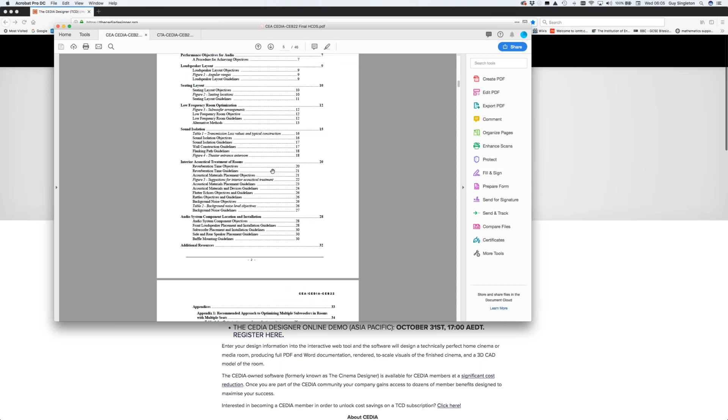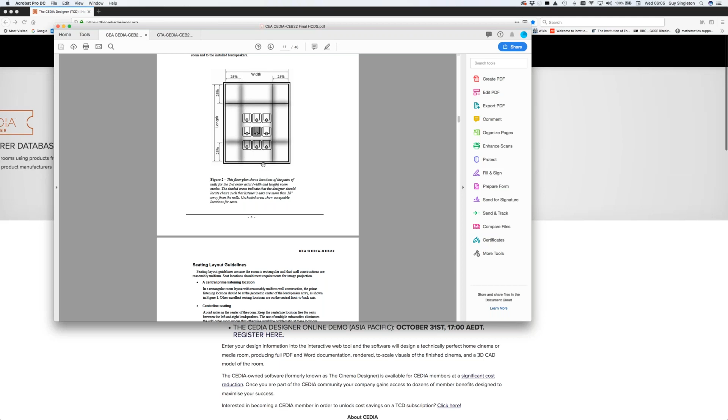TCD isn't subjective. It's not my opinion on things. It's actually based on these two standards, as well as the ITU documents, Dolby's document, DTS's document, other codec development documents, primarily things like Auro as well. So all of those standards documents have all come together to allow us to produce TCD, and in essence, we found it really, really successful to do jobs this way.

TCD has a number of brands in the tool at the moment. I'm sure that if your brand isn't in the tool, it won't be long before it is. Before CEDIA had acquired it, we had about 65 brands or 60 brands, and each one of those had a number of SKUs. So we had maybe 3,000 or 4,000 SKUs within TCD. Now CEDIA have it, obviously it's becoming a lot more of an attractive proposition to some of the slightly smaller and more obscure brands. And we can see this probably doubling in the next 12 months. And then ultimately we have a goal of around sort of 400 potential manufacturers that we are working with or have approached us. So we hope that will be a really good thing.

Pricing, if you're a CEDIA member, and my assumption is that the vast majority of you on this call are, you get the first tier of this for free. So this is media room. This will do your 5.1 subsat systems with a flat panel display. So this will allow you to do a little 5.1, 7.1, flat panel display up to about 65 inch. And that is a free member benefit from CEDIA. So the cost of subscription for that alone is probably worth your membership fee, I would guess. The vast majority of people's day-to-day design and documentation requirements are probably in that media room category.

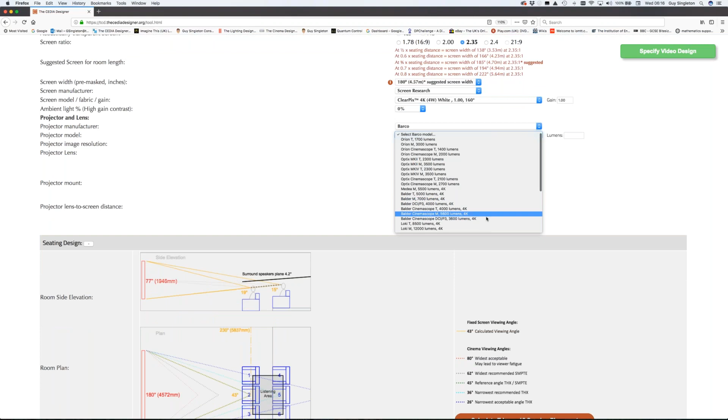So I'm going to choose a fabric. I've got a gain of 1.00, 160 degrees here, so I'm kind of starting to build a bit of a picture. I'm going to choose a projector for this - perhaps a Barco Balder. And now I get to choose the lens of this. So if I choose one of these lenses, an EN68, it's going to tell me that it's a prime lens.

It's a fixed focal range, and my projector has to go there. If I do this one, it's going to tell me it's got to go there, and you can see the projector moving around in the drawing, and it needs to stay within this green cross-hatched area. So if I choose 63, and I can keep going to 61, this is pretty much where I want to use it.

Now, would I like the projector fixed to the ceiling? You can see the projector moving - fixed on a pole, in a ceiling lifter, built into a bulkhead or a coffer, or put through the wall into a projection housing or a different room at the back. And that's pretty much what I'd like to do.

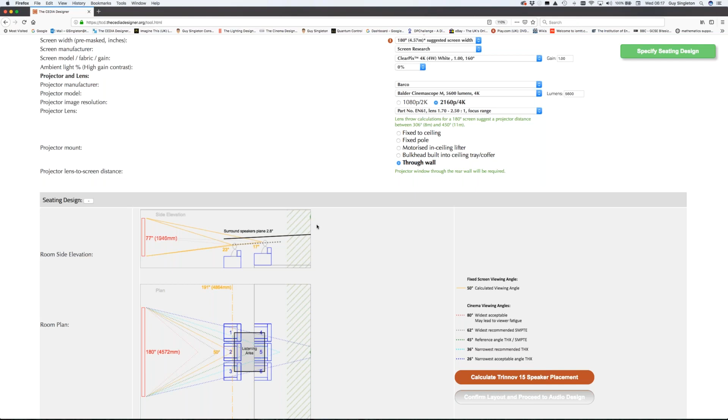This is a big unit, it's fairly noisy. I want to keep the noise floor in the room quite low, so I'm going to put that through the wall. You can just see the lens there. So I know I'm sort of pretty good.

Now we get to select some of the seating. I'm going to choose some Cineak seating, some of these recliners, and I can mess around with the amount of seating and in which area.

If the seats that I really would like aren't in there, you can just go into these fields and add those custom. You could say this is the width of the arm, this is the seat back depth, the seat width. And if I'd like to bring those seats closer to each other, I can, or push them further away from each other. If I'd like to move the gap between the seats wider, you can really play around with this in real time.

Here, I would quite like a little step here, so I can click this extend button. That brings that out. If I'd like to change the plinth riser height, I can do that so that my viewing angles to the screen are better.

Once I'm happy with all of that, I can click custom here, and then I can move the seating backwards and forwards until I'm fairly happy. This is dynamically driven, so this angle that you see here, you can see that's at 50 degrees, 51, 52. As I push that back a little bit, you can see these are the angles that are calculated.

This is kind of reference, and this will give you a really good idea of making sure your viewable angles are correct and your seating is in the correct positions.

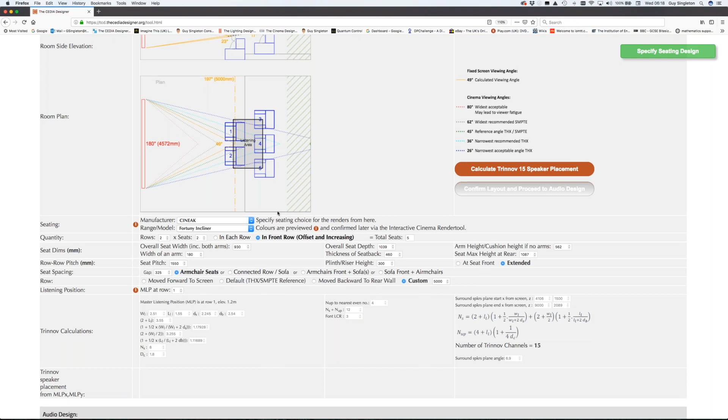So I'll talk you through that briefly. This is the length of the listening area, this is the width of the listening area, this is the distance to the side wall, and this is the distance to the back wall.

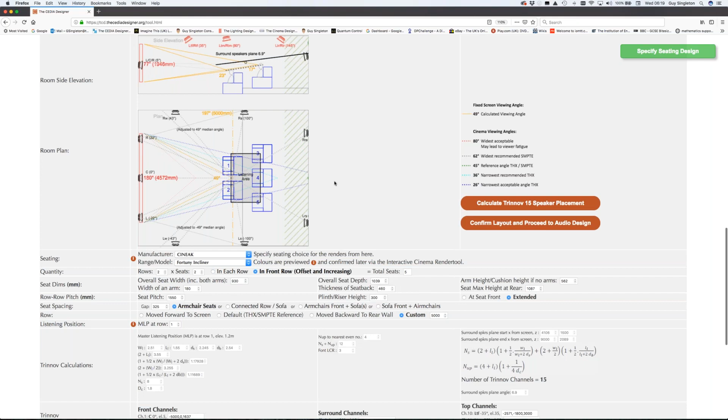Every time I change one of these fields or parameters, it moves and changes everything down here. And then when I click calculate, it will fire off the polar array of where all of those loudspeakers need to be placed.

So this is a correct placement. It does all the trigonometry, and it'll even run a polar Cartesian converter. So if these are polar coordinates, it would convert those to a Cartesian coordinate using a sine cosine converter.

As I add potentially more rows, you can see here that it's going to calculate these to be 21. And as I reduce those again, you can see it's going to tell me that I actually need 15. So rather than just saying this is a 7.1.4, this is actually 15 discretely rendered loudspeakers.

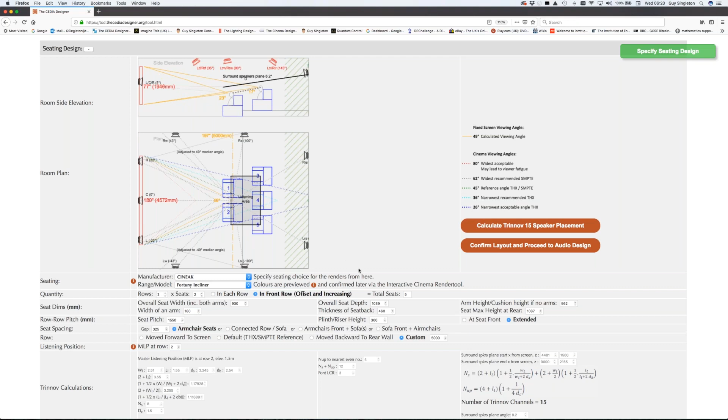You can play around with this a lot until you get what you believe is the best kind of look and feel to everything.

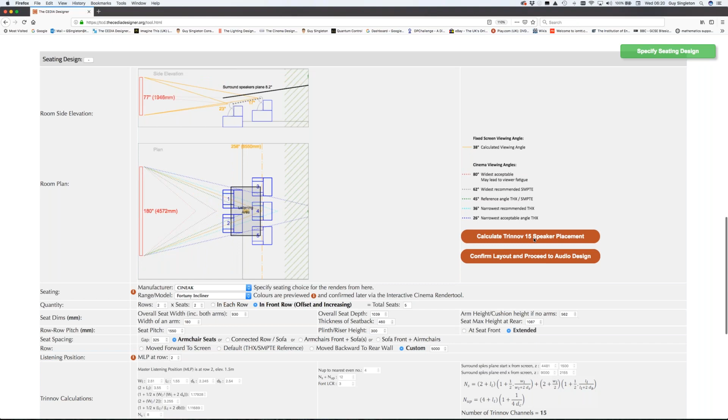You can also change the MLP. So if you wanted to change the master listening position from the front row to the back row, you can do that and then calculate, and you can see that the loudspeakers change slightly. So if your client says they don't want to sit in the front row, they'd like to sit in seat 4, you change the master listening position, recalculate, and the loudspeakers will change in accordance with that.

To do this kind of thing freehand is fairly complex and complicated, so to do this is quite helpful, we found.

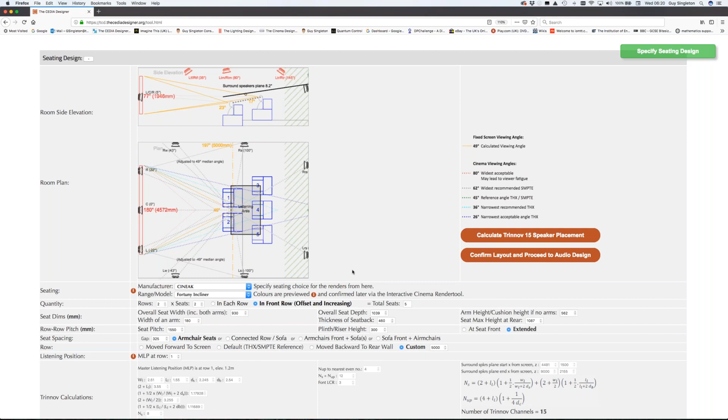This is all of the coordinates on 3 axes, an X, Y, and Z axis, to the exact acoustical insertion point for each of the loudspeakers. So in 3D space, this is exactly where they should be mounted.

Once we're happy with that, one other thing this brings is the bisector angle, and it just brings it in to a median angle. So you can see this front wide left—it should be here where this dotted line is, and it just pulls it back in there, and that fills this gap in a little bit as well.

So we've got a little bisector to median angle converter as well, which we found helpful. Once I'm happy, I can move on.

Okay, so large commercial theatres - this has multiple staggered sides, multiple tiers of seating. Timbre matching: if you check this button, it will only allow you to choose loudspeakers from the same manufacturer, potentially from the same range, with the same mid-range, same voice coil - stuff that's tonally the same with a similar coloration.

This box here, show all speakers regardless of position - if you've got a JBL Everest or a Procella P815, something that's 1.5 meters high, or a Bowers & Wilkins Nautilus, and you wanted to invert that as an Atmos channel on the ceiling, it perhaps wouldn't be recommended, but if you check that box it will allow you to put any speaker anywhere. As I reiterate, I've seen some crazy stuff, so if you do check that, there's something called collision avoidance, which means lots of loudspeakers seem to want to occupy the same space, so you can end up with a few problems.

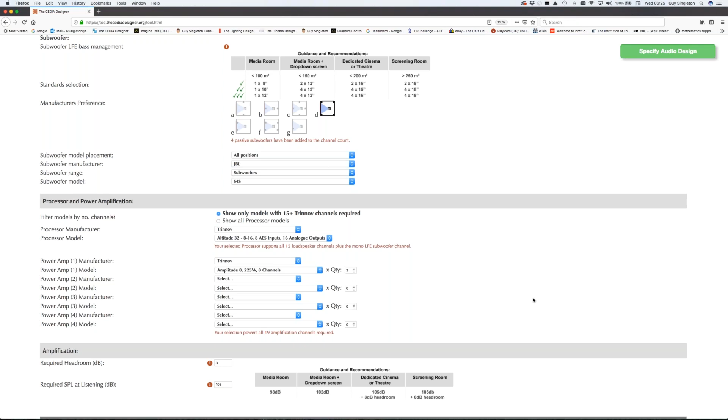Required SPL and headroom: if I need to hit 105 dB at the listening position, and I've got an amplifier with this efficiency, and it's a direct radiating loudspeaker with -6 dB per doubling of distance, I know I'm going to achieve X dB at the listening position unless I have a more efficient loudspeaker, potentially sit closer, and then make sure my amplifier is capable of delivering the power to that loudspeaker. So here I could say, look, I'd like 1 dB of headroom, and I'd only like this to hit 95 dB. And I've given you an idea of what we would consider fairly good.

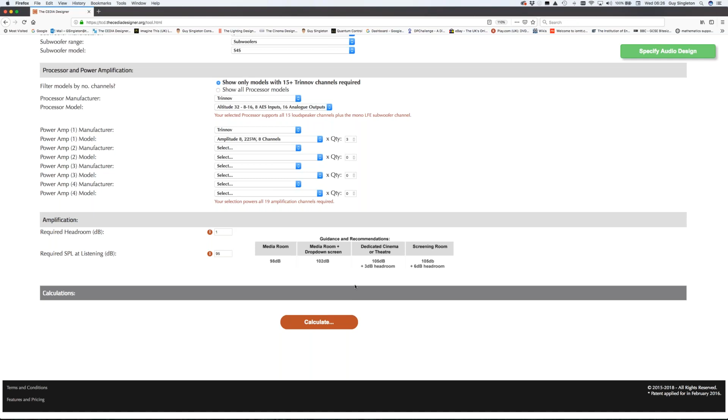To achieve 105 dB with 6 dB headroom in a really large room would be fairly challenging, so I'll let you deal with some of that. Once you're happy, that's pretty much the design done for the technical aspect of things.

Then I'll click calculate. It will run off to the TCD server and start calculating and building the model in CAD. We decided to build things in DXF files because they're very flexible. You can save those files and import them into Visio. If you wanted to use DTools or another software to add layers, light fittings, electrical socket outlets and stuff like that, you can do that. DXF is infinitely flexible. I've worked in CAD for the whole of my career, and we just decided on that as a format.

Briefly, I'm working, or will be working soon, with some people - David Meyer, Tony Grimani, and some other people in CEDIA. There will be an option at some point to select what the loudspeakers are, and then there'll be a performance fact, which will be data that's engineering based and engineering biased. So we hope that will be coming in soon.

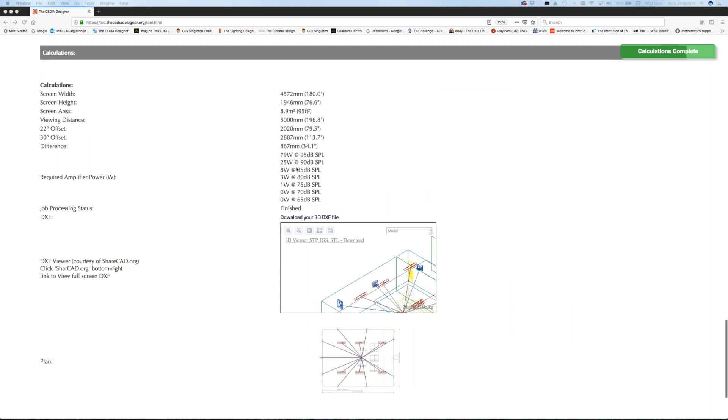This is a quick amplification requirement, so it tells me exactly what I need as far as amplification. This is my loudspeaker requirement. If you don't have CAD, you can download a free CAD viewer here, or look at it online - you could go onto Autodesk and download a free CAD viewer.

I'm going to proceed to renders. Here I'm just trying to build an idea of what the room will look like. So I could say I'd like starlights and a coffer, I'd like the paint finish to be dark, I'd like some blue panels, some different kind of coloured carpets, and I'd like the seats to be red. I don't particularly, but I'm just trying to give you some idea.

I could change the screen grab on this, so I could change this to perhaps a sports car or a hot air balloon or something like that. Then I get to choose where I'd like to sit to take the photograph, so I might sit in seat 3. If I click this button, I'm going to say yeah, I'd like to take the photograph from seat 3, so I'm going to get a couple of renders. Then when I'm happy with these pre-visuals, I'll click happy and move on to my hub.

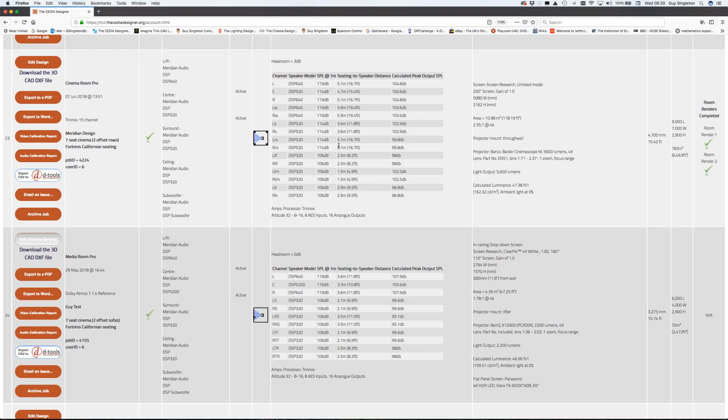So this is all the projects I've ever run through TCD, and you can see here some Meridian audio and perhaps some Genelec stuff. If you're using active stuff, it presents that data in a slightly different way - it knows what the SPL is at 1 meter and will present you a calculated SPL at the listening position. This will probably take a few minutes to render off.

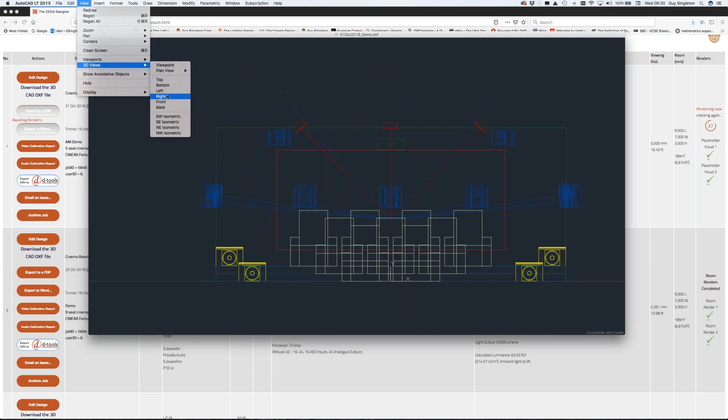So I'll show you the design below. If I export the design below, I'll bring that in from the other thing. You can see I've got all of my loudspeakers laid out, and because it's a 3D view, I get lots of elevations. So I would probably file save as front elevation, file save as side elevation, and then you can start building layered drawings up.

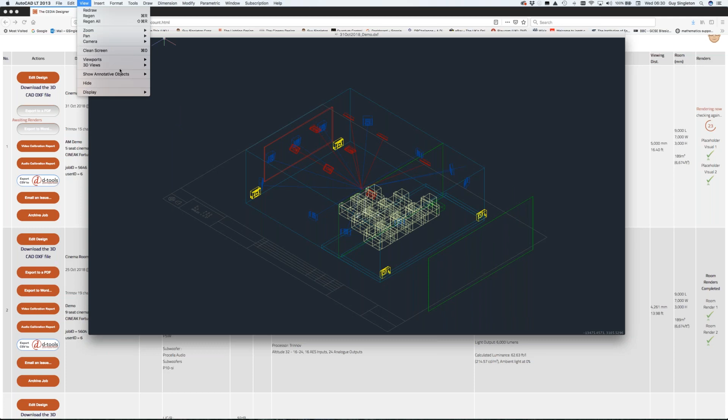It's very difficult to work in 3D space. If I was to pick this speaker up and move it, it's slightly more challenging to work with. I also get 4 elevations. This back green line and this front green line are the primary and secondary lens multipliers for the projector, so the projector can't go any closer than the front green line and any further away than the back one. So that works pretty well - this is the front green one, this is the rear green one.

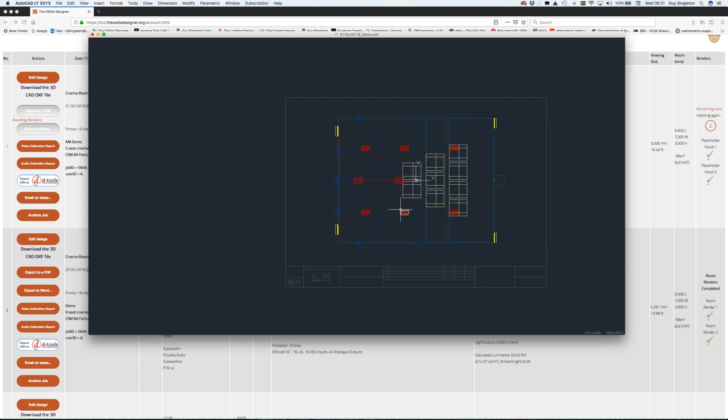Now you can also add some drawing attributes here and print to PDF fairly quickly. So there are 9 drawings - obviously 4 isometrics, a top plan, and 4 elevations. You could literally leave model space, go into paper space, and then print to PDF quite quickly. We also use AutoCAD on an iPad Pro, which is a very low subscription, maybe 20 or 30 pounds, and it allows you to build these and show clients, pinch and zoom and turn the room on an iPad, which we find quite nice.

There are some placeholder visuals, so I just chucked in some placeholder visuals. They're not actually the room as you would know it, but if you can't wait for 3 or 4 minutes, you can see that it will render those visuals off fairly quickly.

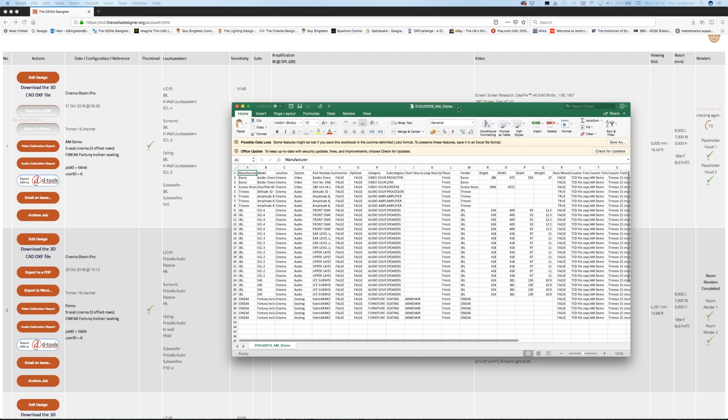Just while we're waiting for those to render off, I'll show you, if you want a bill of materials or something like you work in D-Tools, this will give you a full bill of materials ready to import as a CSV. The minute you import this, it will allow you to create not only your bill of materials, but perhaps your first fix, your second fix, any complexity factors, local area pricing, and taxes and all of those kind of things. We decided not to get into pricing because it's a global tool, and it was just so difficult for us to work out dealer pricing and margin and things like that. So we just give you this, import it into D-Tools or one of your project management tools, and then you can do your pricing from there.

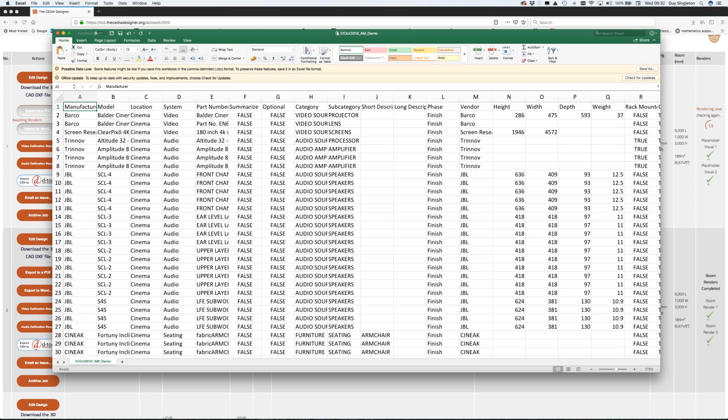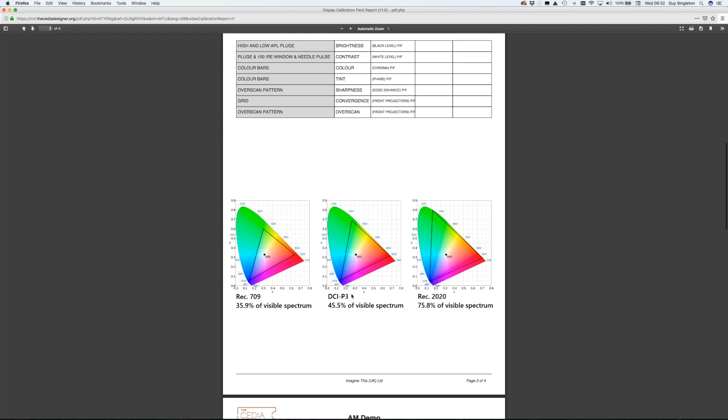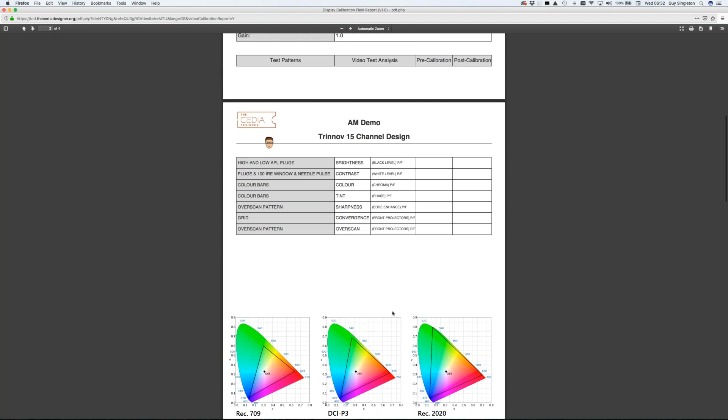You can print off calibration reports. So here's the calibration report you just saw me do. I use CalMan when I'm calibrating, but if you just want to do IRE, grayscale tracking, brightness, color, contrast, tint, overscan, those kind of front panel calibrations, you can just fill this in and send this to the client. We've also done the same for audio calibration. So you can print this off, and obviously if you subscribe, you have your logo on these documents.

If you've got an issue, you can email an issue to us. You can click this and say my speakers did this, or I've got no idea why it didn't quite work the way I needed it to.

You can archive a job, so if the job you've got perhaps wasn't one of your best ones, you can archive that. You can edit the design. We didn't want people to use one design and then re-edit it 1,000 times, so the limitation with editing a design is there's 3 goes at it. You can't change the name of the project, and you can't change the dimensions of the room. There are certain things within that are fairly fixed.

But you can go in and say, look, I'd like to swap the screen out for something else, or instead of using bronze speakers, I'd like to up those to silver speakers so that they give me slightly more performance and those kind of things.

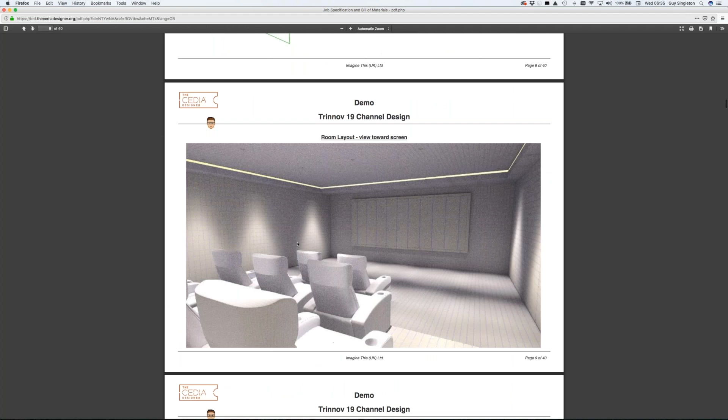It will take off quickly screen grabs from the CAD. So if you don't have access to CAD fairly quickly, it will take those off. It will render the room off in a kind of colorless way that will give you an idea of how the space is effectively going to look without any of the busy colors or any of those kind of things. The seating layout and how the seating is - obviously this is one I did the other day.

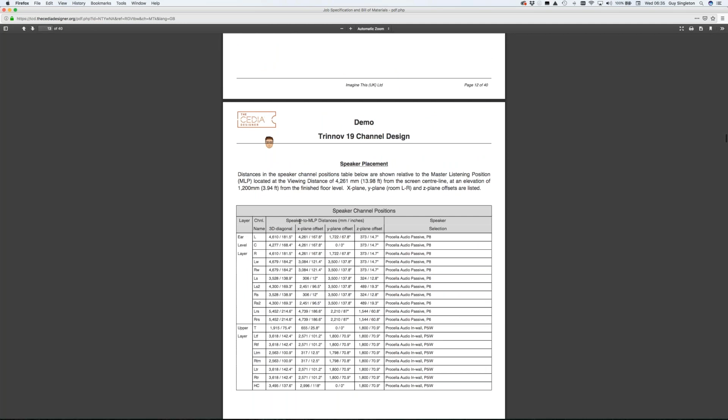This talks about audio, so dynamic range, focus, clarity, envelopment, mean spatial variance, seat-to-seat uniformity, dialogue and speech intelligibility, all of those kind of things. And really, this is a great document to say to your clients, look, we're not just designing it and putting in what we think is the most expensive product. We've designed something that's going to deliver at a performance objective.

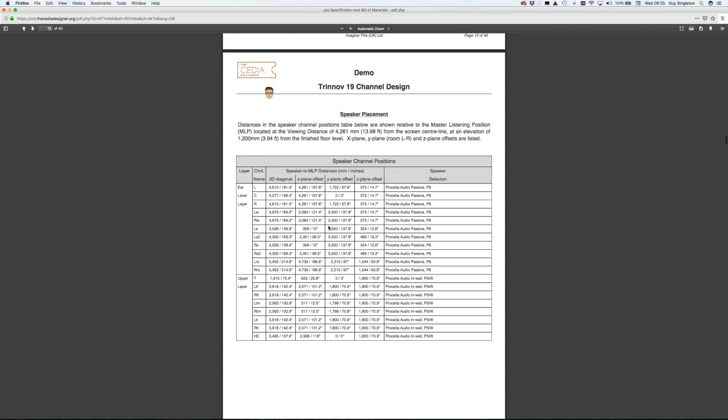So it will go off to the database and pull in all the loudspeakers and all the documents and the dimensions and the weight and all of those things that you need to know.

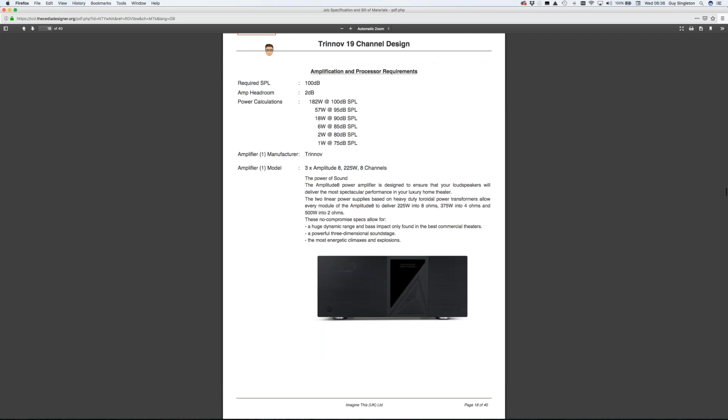Amplification here, you can see this is the processing, the user interfaces for the processing, the I/O schedule - how many SPDIFs, how many opticals, how many rack units - all of those kind of things that as an engineer you need to know.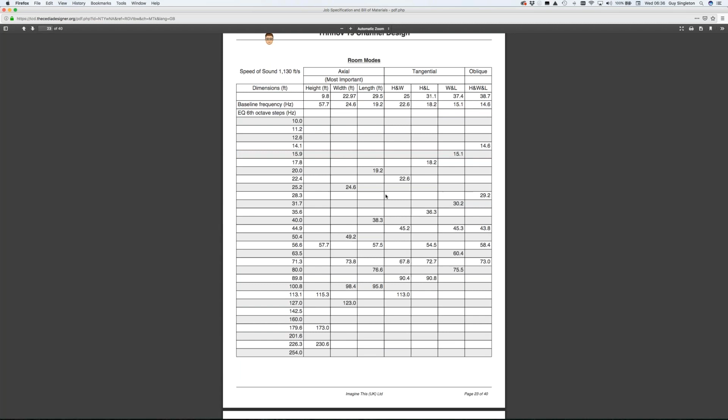This is the modal response to the room, so the first, second and third length modes, where you're going to experience good bass, obviously the axial, tangential and oblique modes as well, maybe slightly less important - the first three length modes.

The video - so we're talking about dynamic range, color accuracy, color gamut and resolution. In our opinion, or certainly in my opinion, that's the hierarchy that video really needs to be considered.

Video requirements - so what the screen is, where the projector needs to go, what the off-axis viewing of the screen is. This is a sample of the screen.

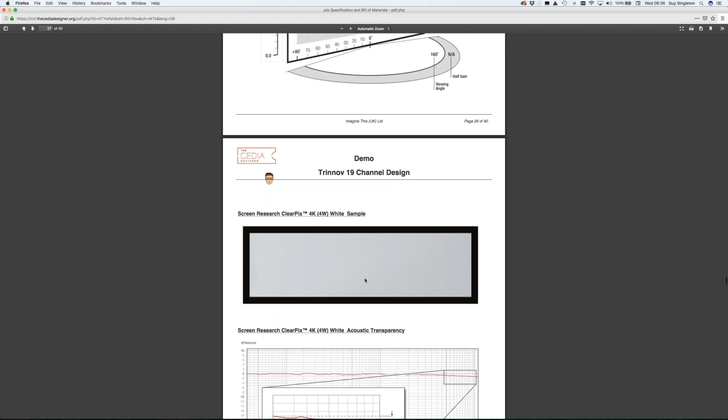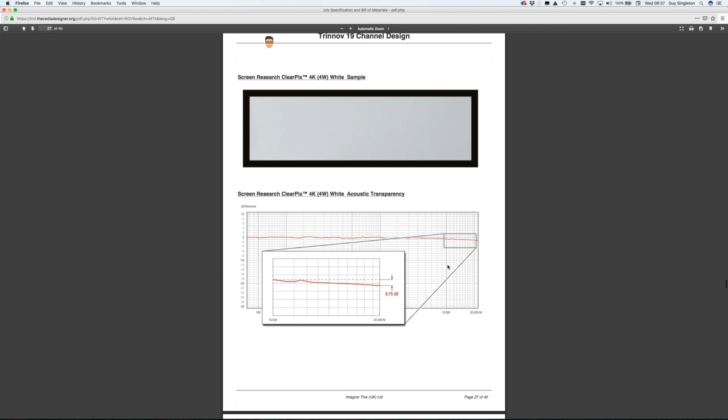This is the attenuation that the screen offers to the higher frequencies over 10 kilohertz. Here you can see that we've got a 0.75 dB roll-off in the high frequencies for loudspeakers that are located behind the screen.

I know that using this projector on that screen size, I'm going to hit 62 foot Lamberts or 214 candelas per meter squared, which is a pre-calibrated figure. This I used on this occasion, a Sim2.

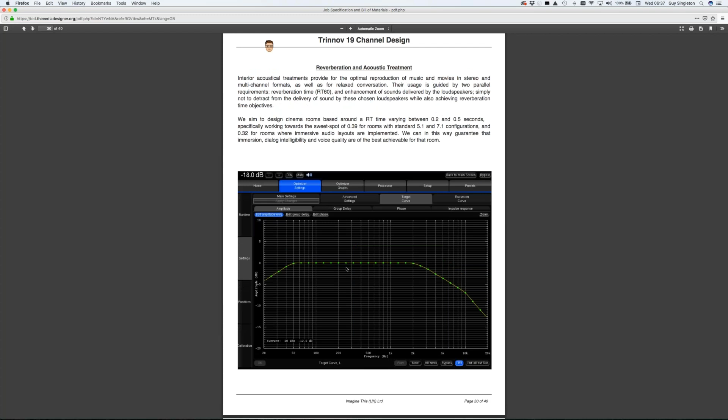Here I've got - we've talked briefly about how the room will be designed and built, so we talked briefly about target curves, impulse responses, and the Sabine equation, so the RT60, the reverberation time of the room.

We do the reverberation over 6 octaves - so this is 125 hertz, 250, 500, a kilohertz, 2 kilohertz, and 4 kilohertz. And here you can see that I've got an RT60 of 0.383.

I can tell you how much materials I need to buy and order. You can see the materials that I put in on this occasion, which were from certain manufacturers, so we're bringing all the data from those.

Now we've got the seating data, and then I don't know if you remember, you get to choose which chair you'd like the photograph taken from, and then you get an idea of what the room will look like.

So this is a 40-page PDF that's ready within a few moments. Okay, so the one that we've just done is now completed - so that's how long it took.

Okay, so this is the AM demo you've just seen me do. This is 39 pages, it's pretty much the same. You can see that I've used the JBLs on this occasion.

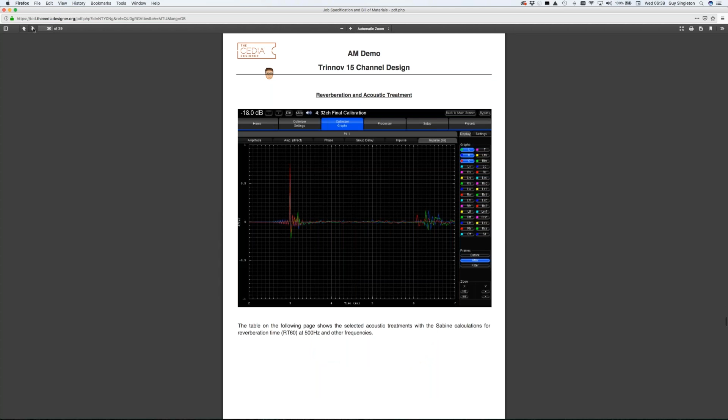So you can see here that I've taken a picture from the screen that I did.

Then once you're happy with that, so you get the CAD, the PDF. If you would like to bring that into your company documentation and edit that slightly and change some things around, you can export that to Word.

So that PDF that you've just seen me bring in, it would export that to Word, and you can cut and paste that and make that look like your own company kind of look and feel.

That's pretty much the design. You can see that I get to go in and change things and revisions and things like that.

We are working - we think that perhaps by ISE there'll be another little button here that you can click on that will allow you to download, we're going to call it an immersive visual. And when you download that to your tablet, you'll be able to look around the room, and it'll also work on Google Cardboard.

So you could email that image to your clients and just say, what do you think, do you like it? They could download that to their own tablet, look around the room - yeah, I like this, I like that, can we change this, can we change that - and you can run some revisions and stuff like that. So it will work as you've seen there, and it will also work on Google Cardboard.

We do have a developmental roadmap at the moment. We're looking - baffle wall will not be too far away, so the introduction of baffle wall, there are lots of things we're working on over the coming years, which we've thought long and hard about what we consider to be important. Obviously everybody has their own ideas of what would be good, but we've got a fairly fixed roadmap for certainly the next 12 months.